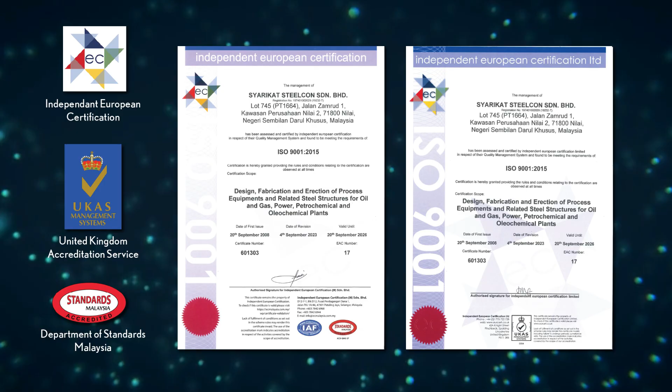Steelcon is an ASME authorized U&S stamp fabrication shop with ASME audited quality control systems. We have also established a quality management system, QMS, and was accredited to ISO 9001:2015 by Independent European Certification, United Kingdom Accreditation Service, and also Department of Standards Malaysia.

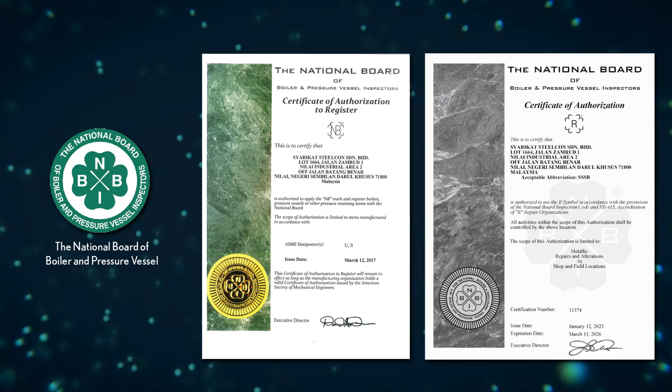Our wide experience in pressure equipment fabrication has earned us accreditation by the National Board of Boiler and Pressure Vessel for NB and R stamp.

In 2024, we managed to obtain Korean Safety Certification KGS, as KGS certification is recognized by many international clients. It helps us to participate in projects in Korea and beyond Korea, as it strengthens the company's reputation and competitiveness in the Asian market.

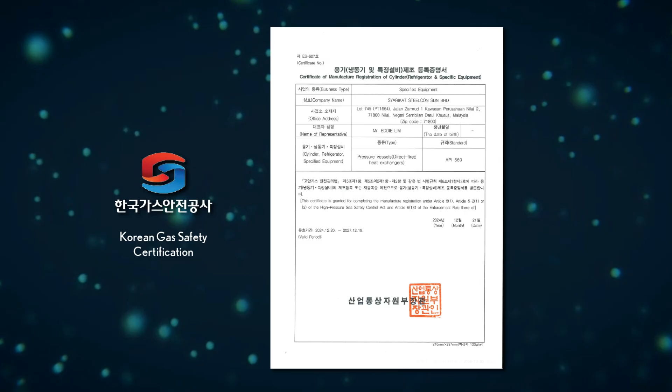At Steelcon, safety is not just a policy, it's our culture. For half a century, we have made safety our top priority, ensuring that every project, every process, and every person operates in a secure environment. We believe that every accident is preventable, and through strict compliance, continuous training, and a commitment to excellence, we strive to maintain the highest safety standards in the industry. Because at Steelcon, safety isn't just a requirement, it's our responsibility.

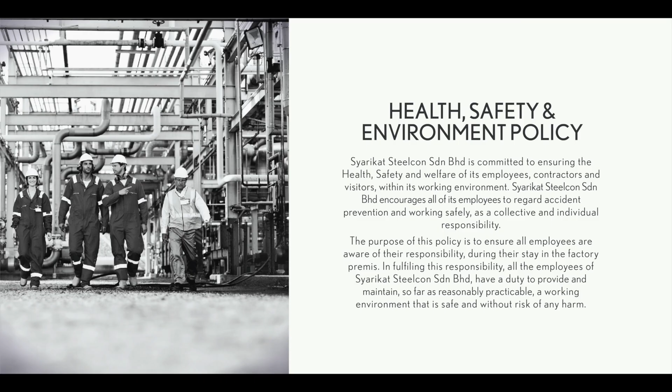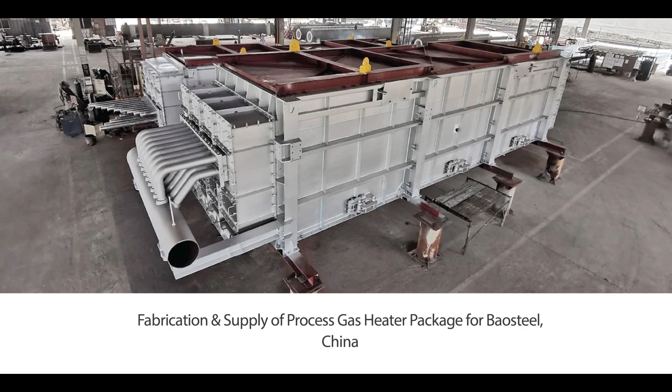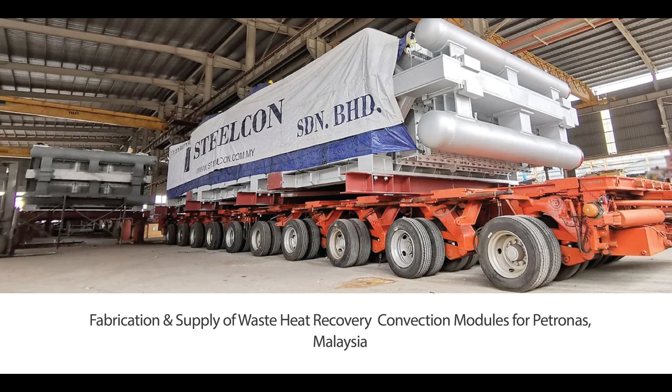For our past experience in reformer and heater: fabrication and supply of process gas heater package for Bao Steel, China. Fabrication and supply of waste heat recovery convection modules for Petronas, Malaysia. Fabrication and supply of hydrogen manufacturing unit, reformer, and WHRU for Hengyuan Refining Port Dickson, Malaysia.

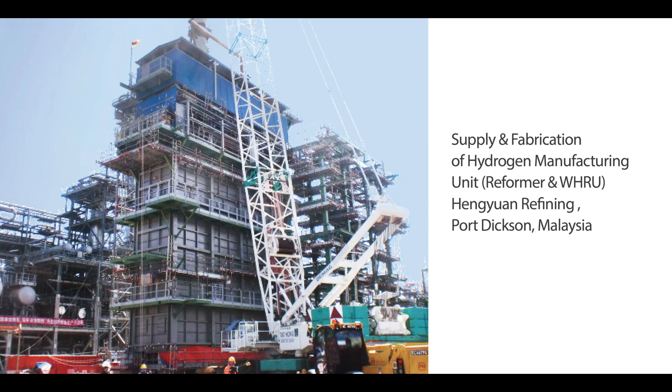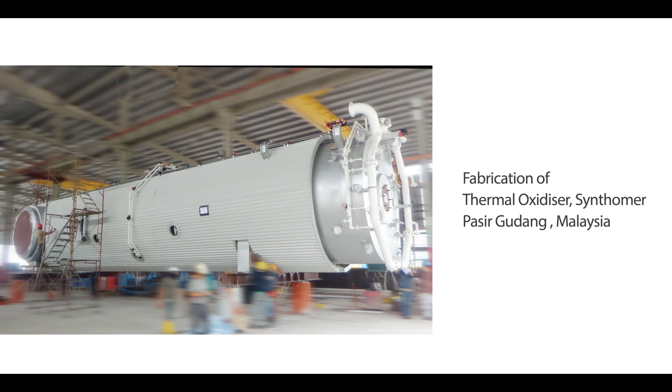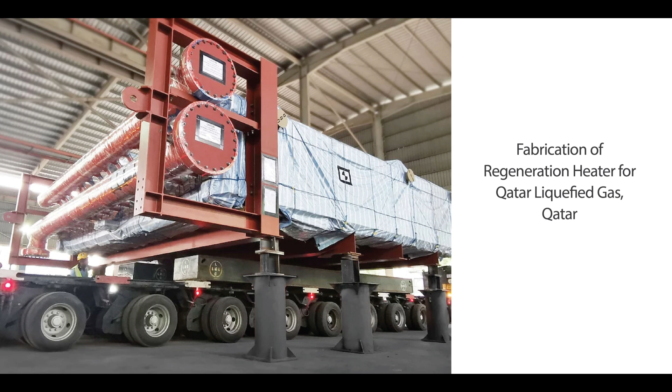Fabrication of regeneration gas heater convection module for Bintulu, Malaysia. Fabrication of thermal oxidizer, Synthomer Pasir Gudang, Malaysia. Thermal oxidizer, PT Pertamina EP, Indonesia. Fabrication of regeneration heater for Qatar Liquefied Gas, Qatar.

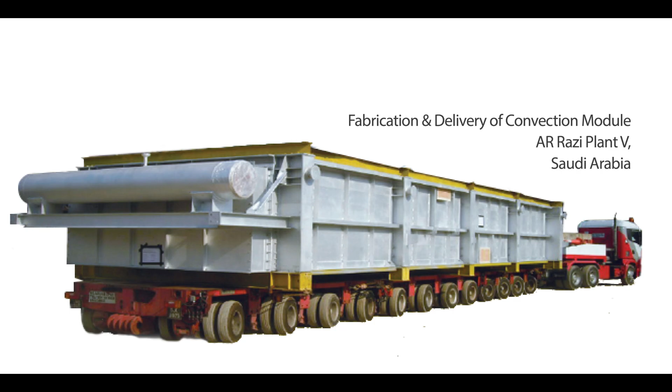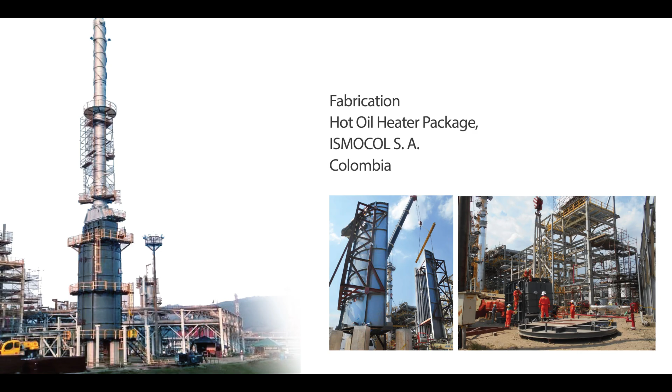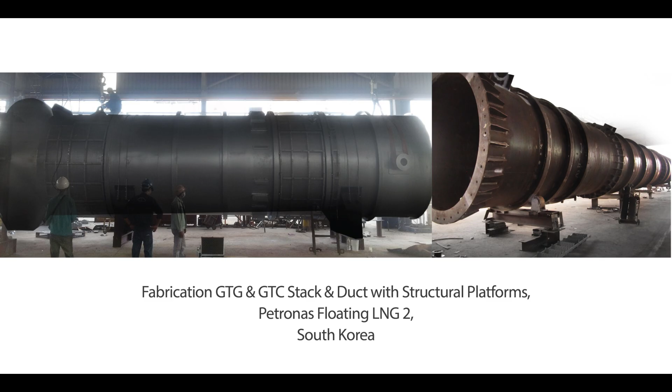Fabrication hot oil heater, GASCO Ruwais, Abu Dhabi. Fabrication and delivery of convection module, AR Razi Plant 5, Saudi Arabia. Fabrication hot oil heater package, ISMOCOL, Sociedad Anonima, Colombia. Fabrication and delivery of WHRU, Heurtey Petrochem, Saudi Arabia. Fabrication gas turbine generator and gas turbine compressor stack and duct with structural platforms, Petronas Floating LNG-2, South Korea.

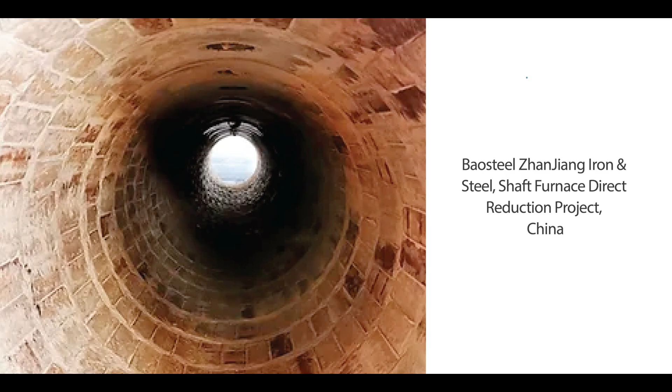For cold collector, Steelcon is one of the approved vendors by Haldor Topsoe, our work included Baosteel ZhanJiang Iron and Steel, Shaft Furnace Direct Reduction Project, China, and Heydar Aliyev Oil Refinery, Azerbaijan.

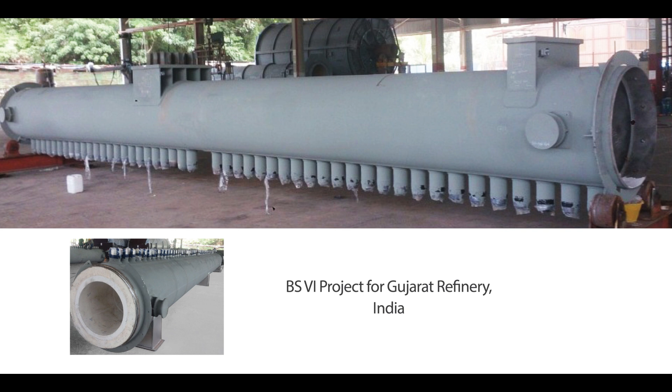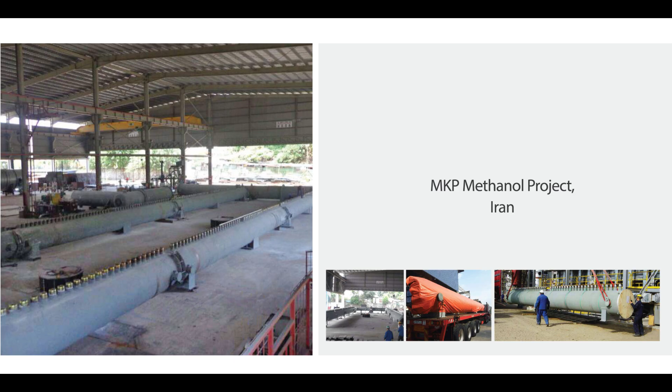Bharat Stage 6 Project for Gujarat Refinery, India. Danghara Refinery, Toji Osayo Limited Liability Company, Tajikistan. MKP Methanol Project, Iran. Tatneft Steam Reformer, Taneco, Russia.

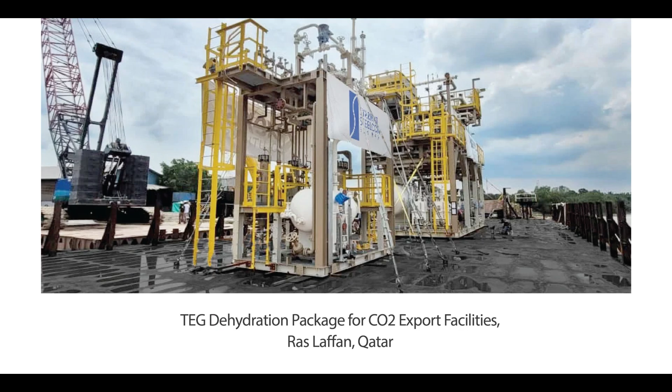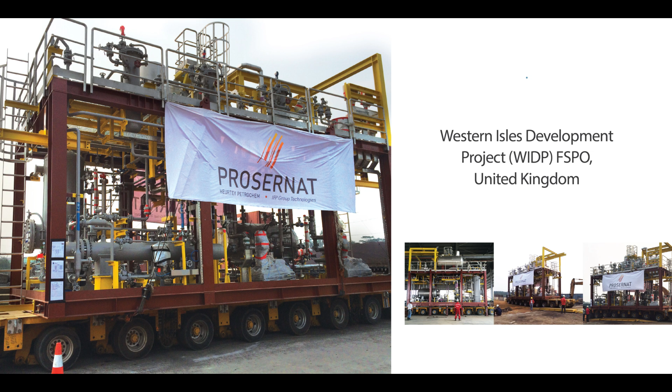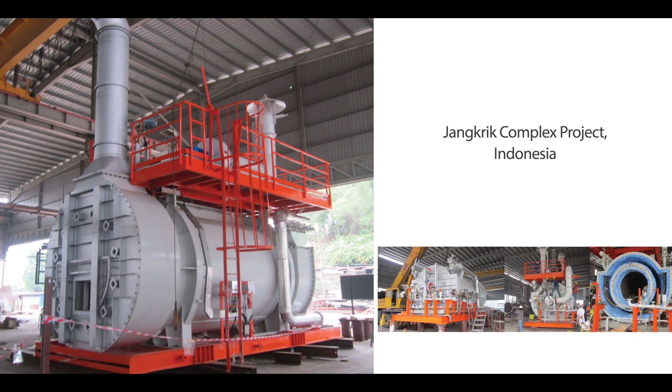For skid: TEG dehydration package for CO2 export facilities, Ras Laffan, Qatar. Bidboland 2, Iran. Western Isles Development Project FPSO, United Kingdom. Pyrenees FPSO Development Project, Australia. Jangkrik Complex Project, Indonesia. Pengerang Cogeneration Plant, Malaysia.

At Steelcon, we have a complete site job team with relevant qualifications such as OGSP and CIDB, mainly to handle crucial site work with fast turnaround such as erection, maintenance and replacement jobs at site.

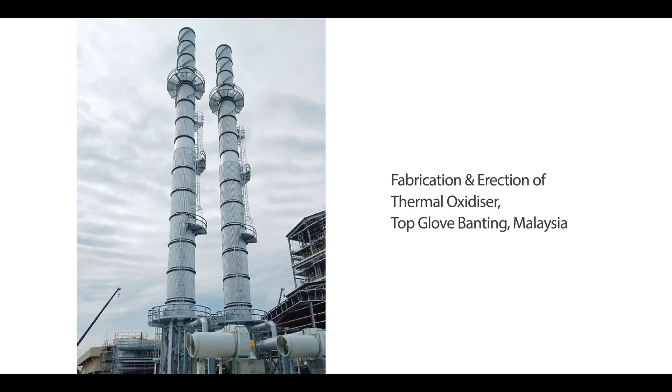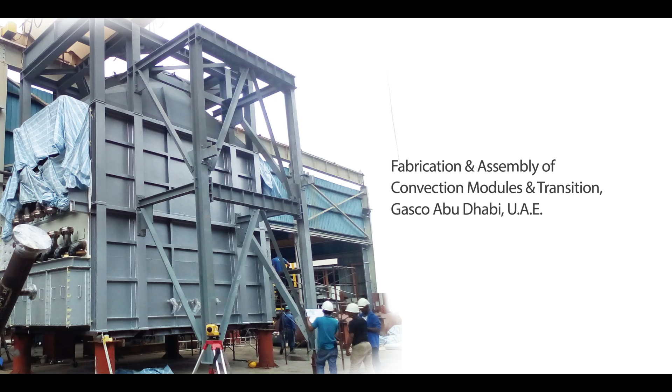Our experience includes fabrication and erection of thermal oxidizer, Top Glove, Banting, Malaysia. Fabrication and assembly of convection modules transition, Gasco Abu Dhabi, UAE. Fabrication and erection of steam reformer, Petronas Methanol Plant, Labuan, Malaysia.

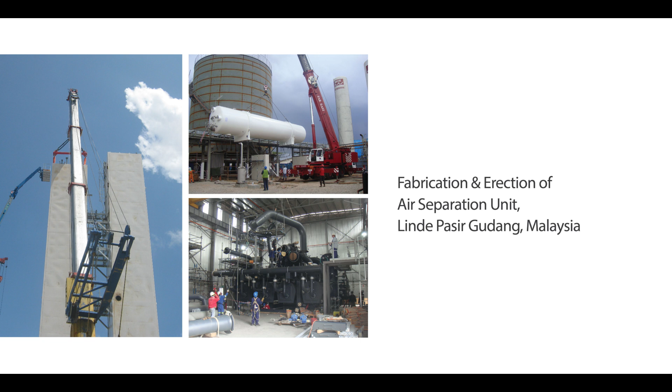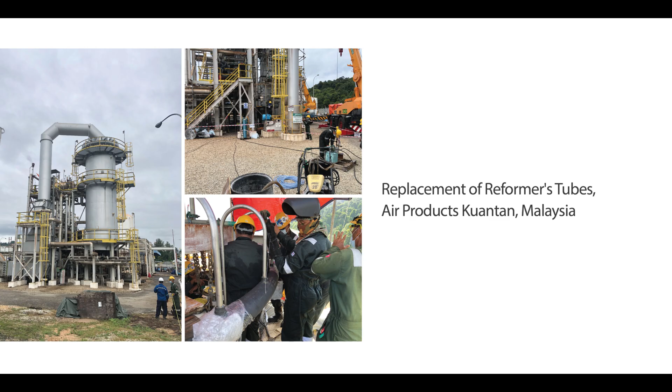Fabrication and erection of air separation unit, Linde Pasir Gudang, Malaysia. Replacement of reformer tubes, Air Products Banting, Malaysia. Replacement of reformer tubes, Air Products Kuantan, Malaysia.

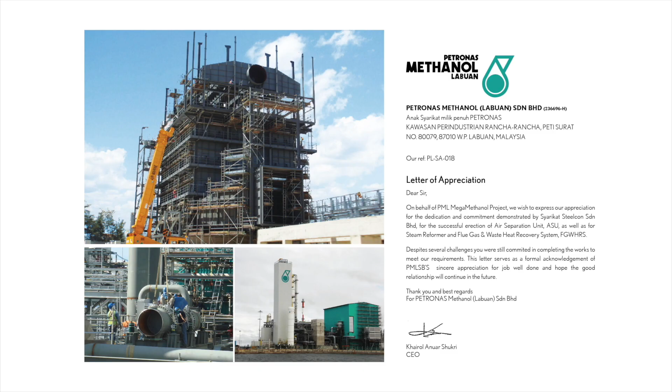One of Steelcon's policies is to provide excellent quality product and excellent service to meet our customer specification and requirement for total customer satisfaction. For our business relations, we wish to achieve and sustain long-term growth through continuous improvement with our clients.